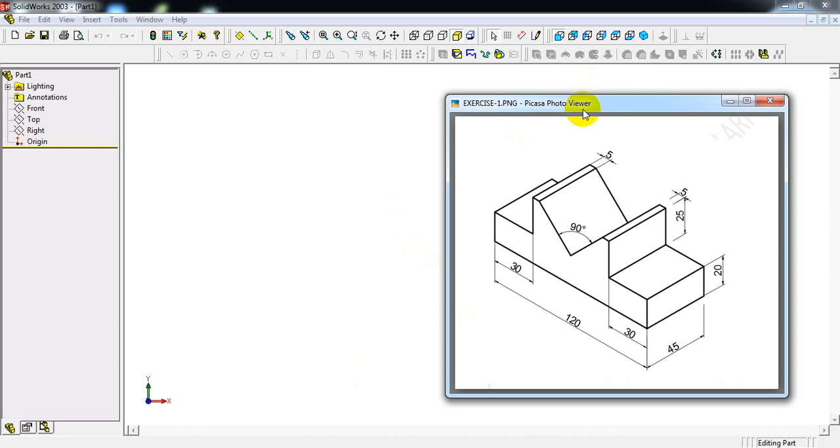So first we have to draw one rectangular block. Then we have to cut this one and this one.

Select sketch. Select rectangle command. Draw one rectangle. Select dimension.

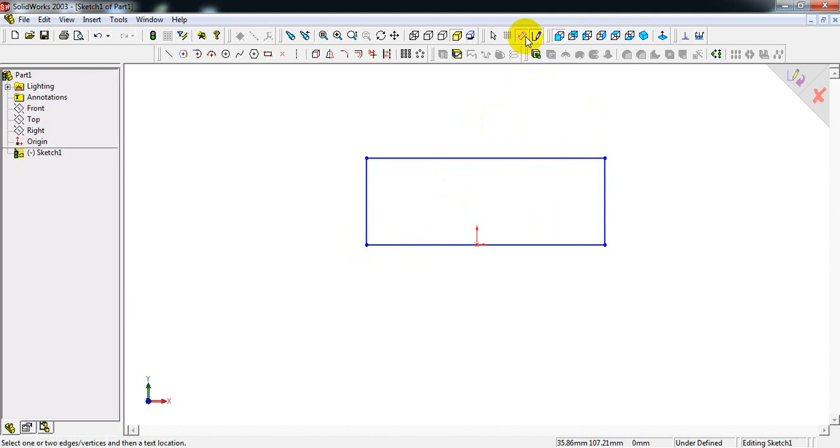Length is 120 mm, so do the dimension. Length as 120 mm. Next height is 20 plus 25 mm. Select this vertical line and make dimension as 20 plus 25, so it is 45 mm.

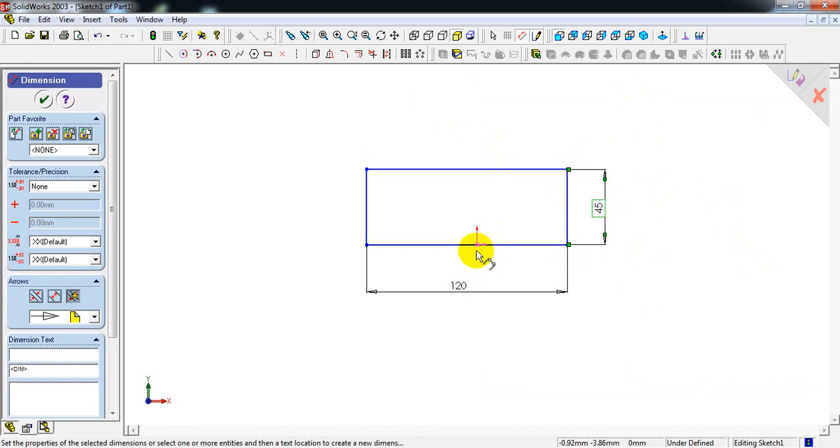If you want to make it center, select origin point, select one edge, and make it as 120 divided by 2. So now it is exactly in center.

Now select isometric view. In the sketch as given, width is 45 mm. So we have to extrude it.

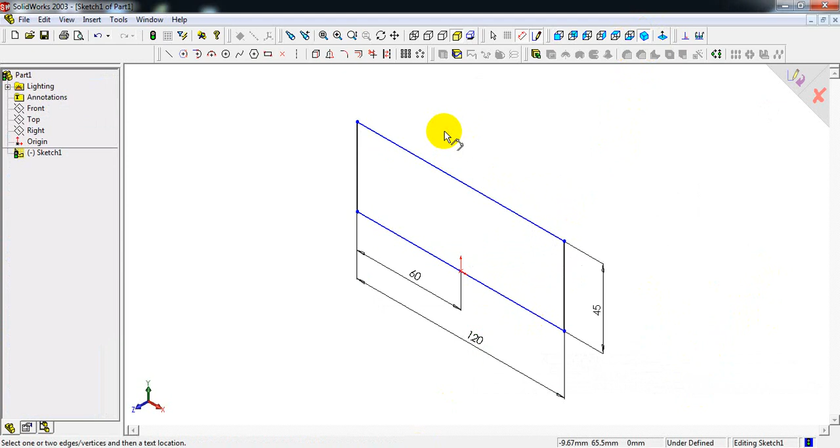We have to take extruded boss base command and here enter 45 mm. Enter 45 and select OK. So this is our rectangular block.

See, this is the diagram. We have to obtain this isometric block.

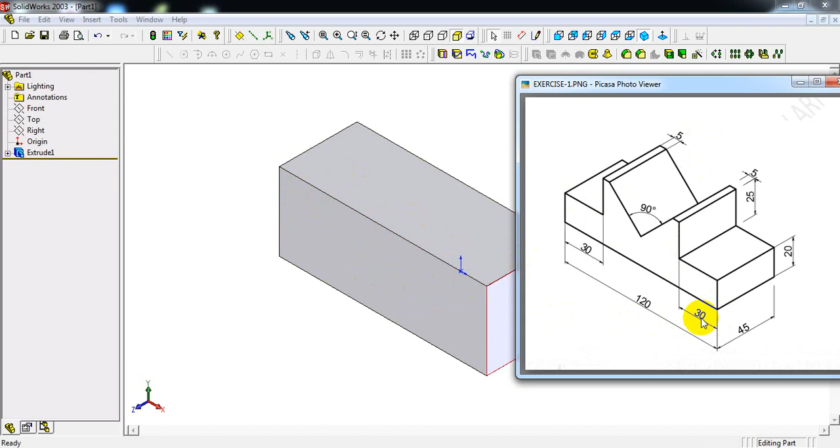Here we have to draw one rectangle, and from this corner we have to draw one rectangle. Make dimensions as 30 and 25, 30 into 25. Select front face. See, this is the front face, this is the top face, and this is the right face.

Now select the front face followed by front view. Again repeat the process. Select sketch. Take rectangle command. From top left corner draw one rectangle. From top right corner draw one rectangle.

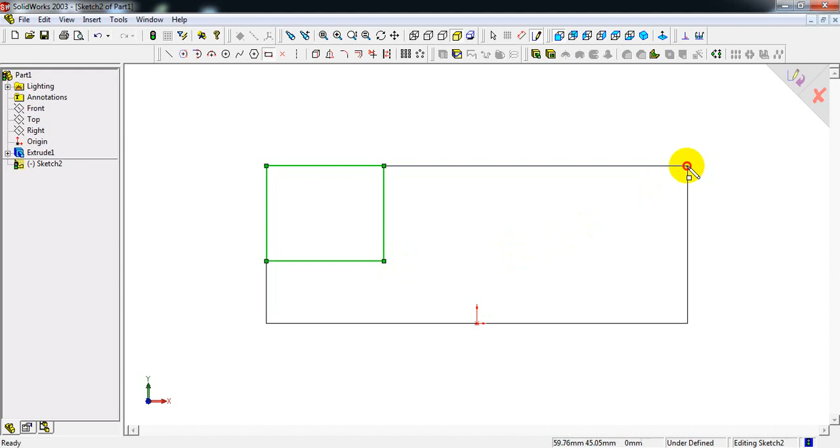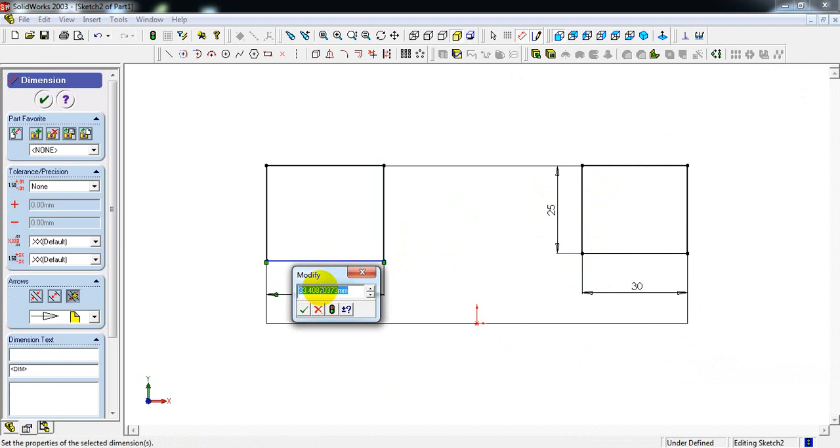Make dimension. See here, length is 30, height is 25. So length enter as 30 mm, height make it as 25 mm. Again here same dimensions, 30 into height will be 25. So 30 mm, height is 25 mm.

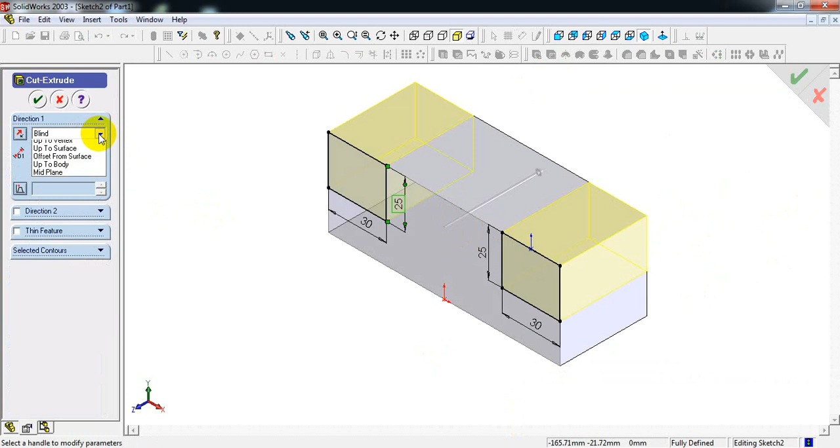Now select isometric view. Extruded cut, so we have to cut entire length of this part. See here it is cut through all. So here also, in place of blind, select through all and select OK.

Now we have to cut this portion. It is V shaped and it is 90 degrees here specified, and it is at a distance of 5 mm.

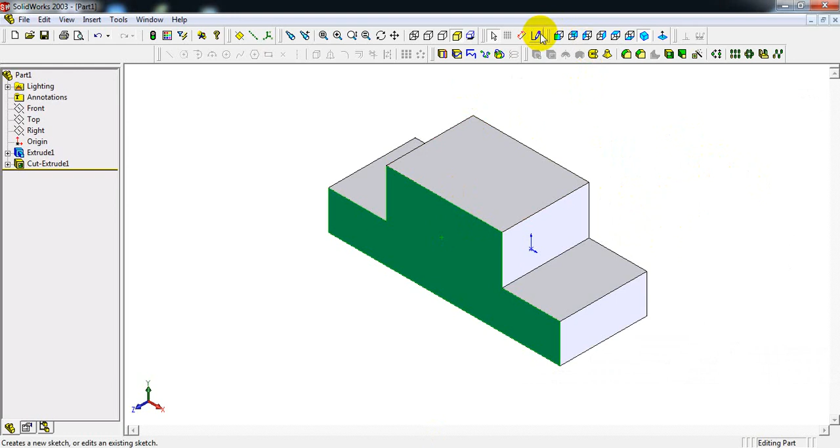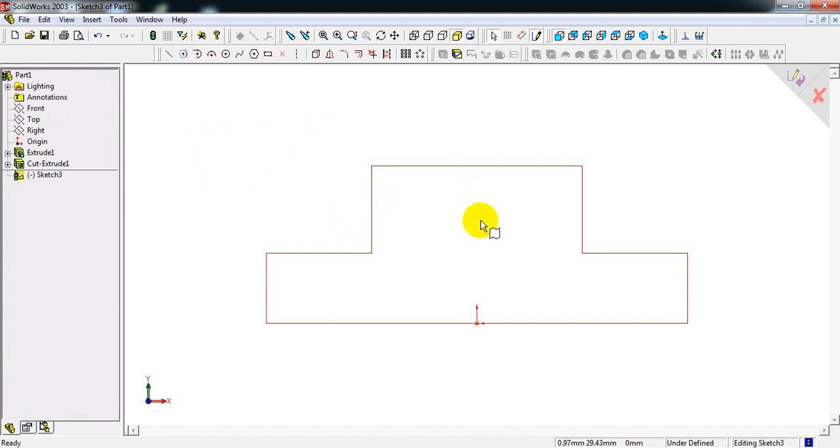Again select front face, front view, sketch, take line command. See, in line command, if we are starting from this point, so ending should be this point only. Starting must be the ending point. Starting should be always ending point in SolidWorks, because if the sketch is open, the extruded boss base or extruded cut command will not execute.

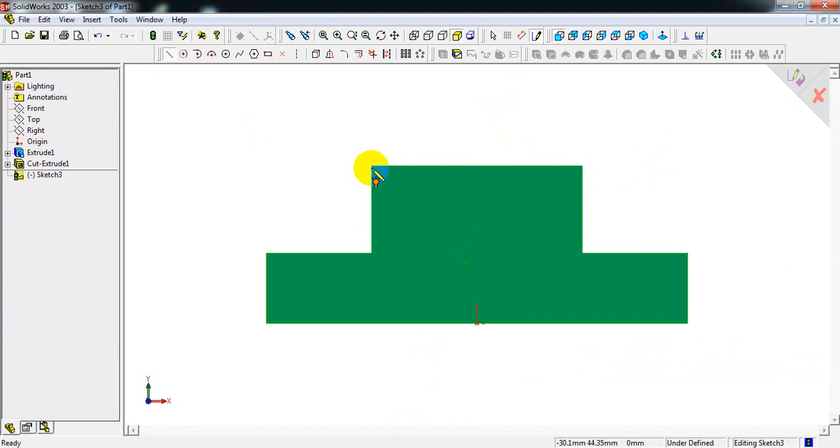Select line command, so from here to here it is 5 mm. Don't start from the edge, leave some gap and start drawing the sketch. Draw one inclined line, one more inclined line, and one horizontal line.

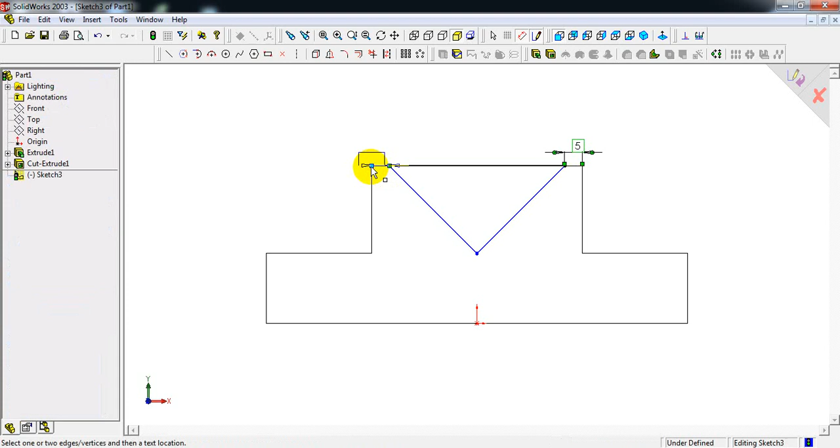This is the starting point and this is the end point. Now make dimension from this point to this edge, take it as 5 mm, and from this point to this corner, take it as 5 mm. In this sketch it has been given as 5 mm.

Next, here we have to obtain 90 degrees. In order to obtain the 90 degrees, its height should be 20 mm, and from this edge to this point it should be 60. Now measure the angle, it is 90 degrees.

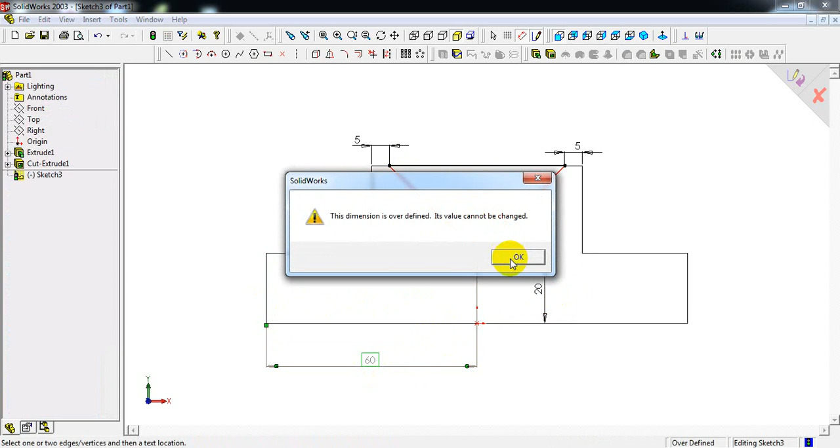Now select isometric view, extruded cut. So here this shape is cut throughout the block. Select through all, or we can give it as 45 mm. Select. So this is our first model.

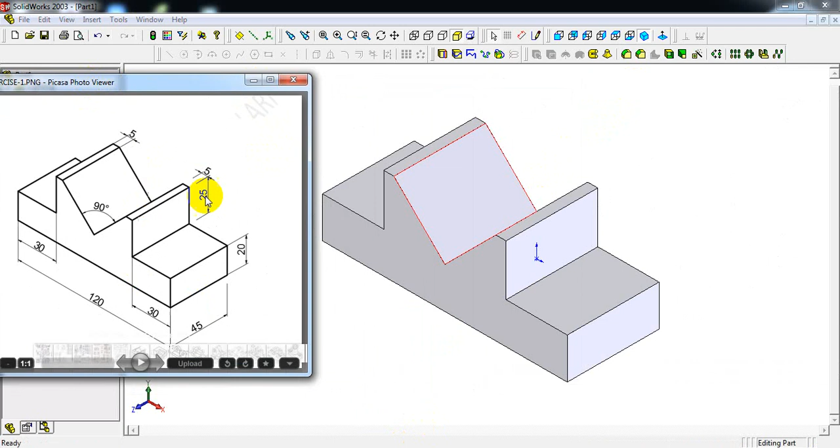So how to do dimensioning for this block? He has given some dimensions here. So do the dimension as per that. Select dimension, select this edge and this edge.

It is 120 mm. Again select this edge and this edge, 45. Next select this edge, it is 5 and 5. This line or this line, it is 5.

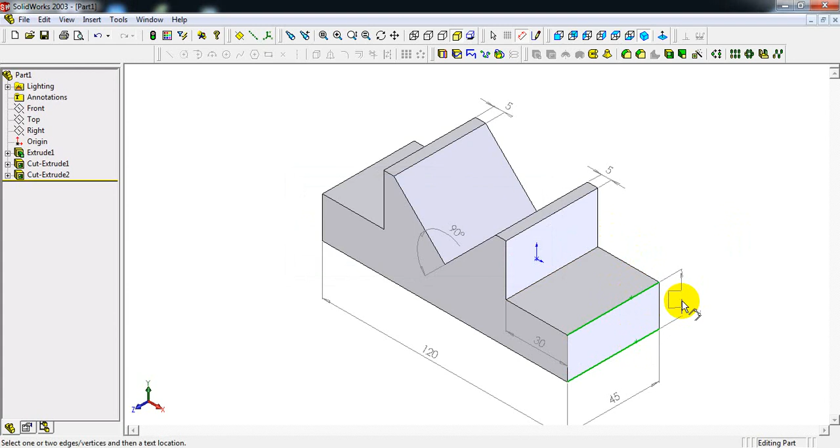Next angle is 90 degrees. Next this is 30 mm. Next height is 20 mm, here it is 25 mm. Or else take it as overall height, it is 45 mm. Okay, these are all the dimensions.

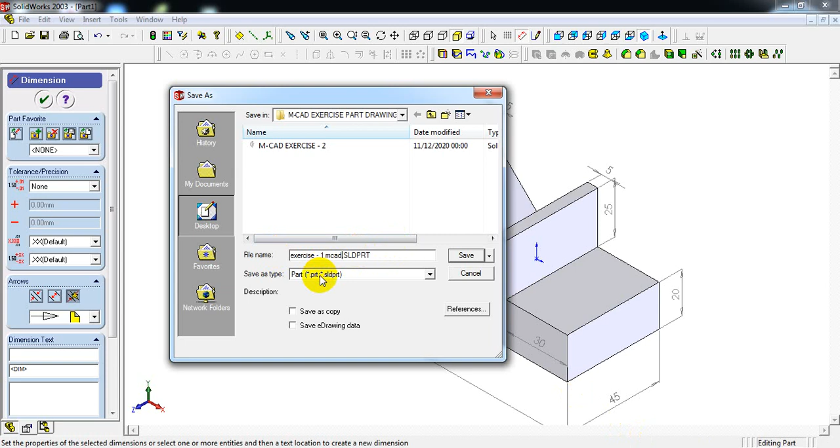Go to file, save, name it as your convenient. I am giving it as exercise 1. So I have named it as exercise 1. Save.

In the question he has given, create front, top and side view for the given isometric part. So this is the isometric object. We have to obtain front, top and side view.

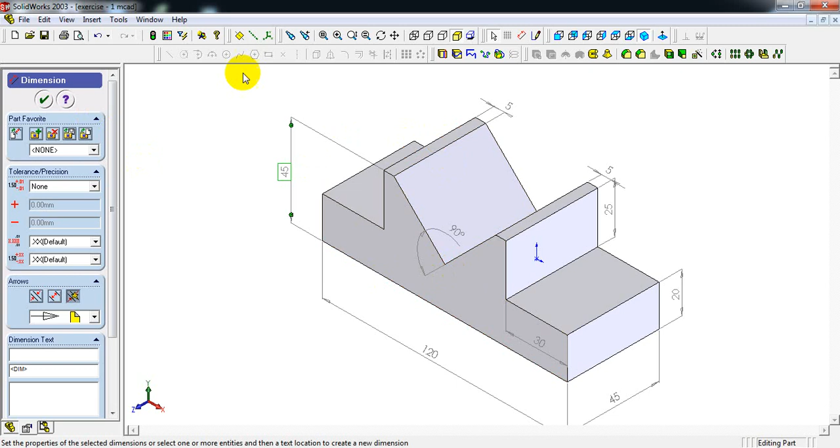So first we have to save the file, save this part. Next go to file, new, here select drawing and select OK. So this window is displayed.

Observe carefully. Select no sheet format. Here select the paper size, make it as A4 landscape, and select OK.

So now go for predefined view. You can see the icon here. Select predefined view and drop it on the bottom right corner, and here it should be isometric view. So select isometric.

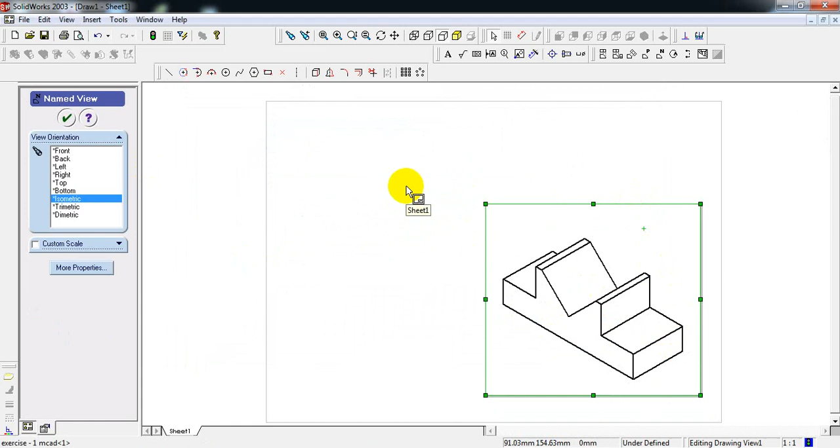So how to obtain? Here select beside of predefined view, you will find standard 3 views. Select this. Within this box, we have to click within this box, not on the object but inside this box. Click on it and select OK.

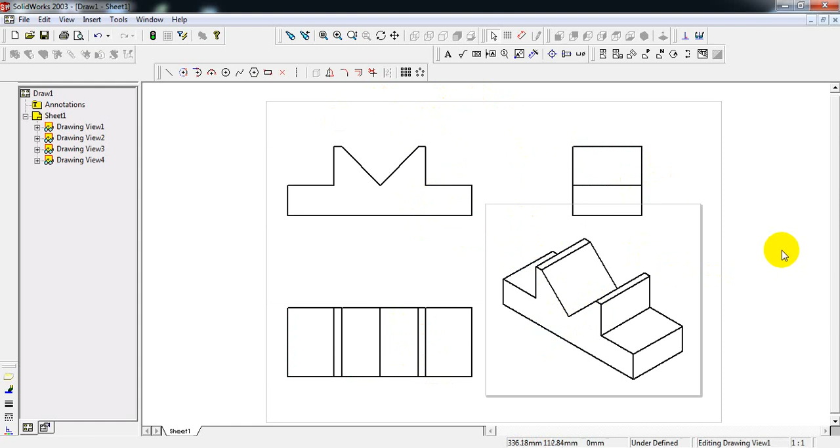So this object's front view looks like this, top view is like this, and side view is like this. Now we have to do the dimensioning for this. So instead of doing individually, we have one command here. Go to insert model items and select OK.

So what are the dimensions we have given during the projection of this isometric part? Everything has been displayed here. So whichever is not required and whichever has been repeated twice, you can click on that and directly delete it.

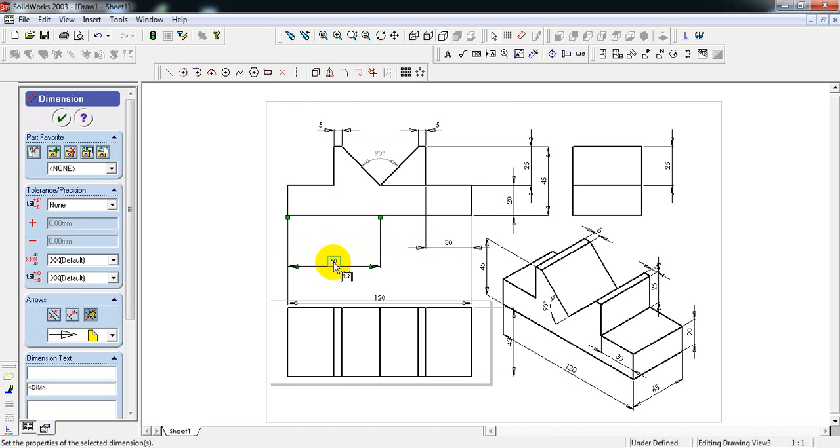Arrange it properly. So everything should be displayed within this boundary line. So this is our A4 landscape sheet.

So 297 comma 210. So next, select note, click here. This is our front view, so name it as front view, and do it in caps lock.

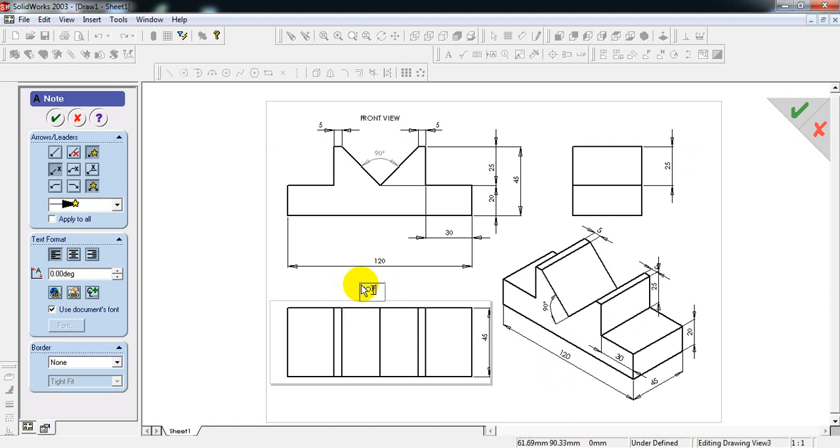Front view. Next, this is our top view, and this is the side view. This is the isometric view.

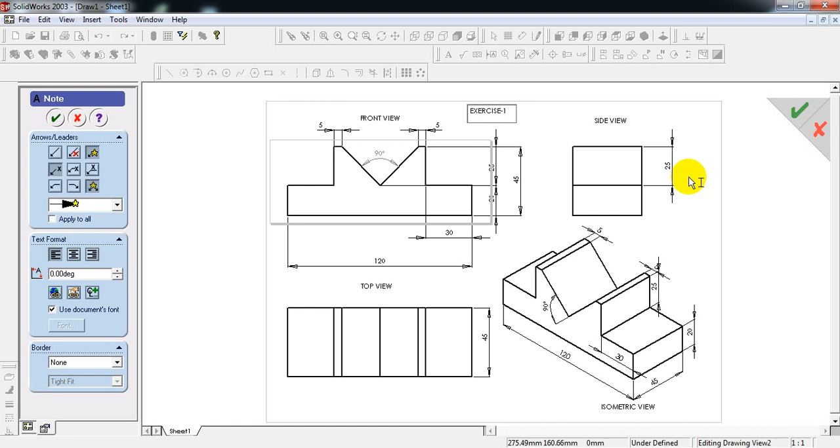And this is exercise 1, so I am giving title as exercise 1. So this completes your first exercise.

So first we have to draw a part of isometric object or isometric machine part, then we have to obtain the 3 views. After this, save the file, give it as exercise 1. Now save.